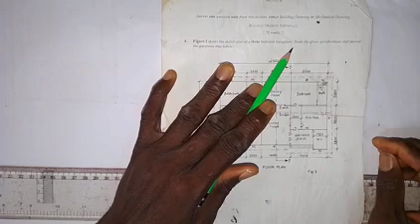Here we're going to be working on this building drawing problem. Figure 2 shows the sketch plan of a 3-bedroom bungalow. Study the given specifications and answer the questions that follow. So the specifications that we are talking about, I don't have it as hard copy here with me, but I have it as soft copy on my laptop, and I will be making use of whatever we need from the specifications on my laptop.

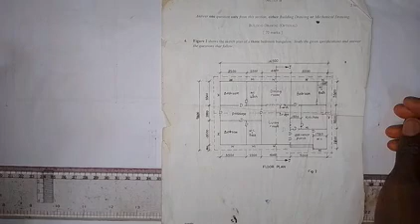And let's look at the dimensions on this sketch plan. So the distance from here to here is 14,500, that is total length, and total width is 9,800. From here to here is 3,500. From here to here is 2,000. From here to here is 4,000. From here to here is 5,000 to this end. And then we have that from here to here is 1,500.

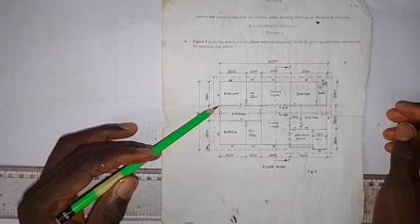On this side we have that from here to here is 3,500. From here to here is 2,000. From here to here is 3,500, and from here to here is 800. So we have from here to here to be 2,800, from here to here 3,500, and from here to here 3,500. So we are going to make use of these dimensions to produce the sketch plan first. Then we go on and work out the thickness of the wall as we proceed.

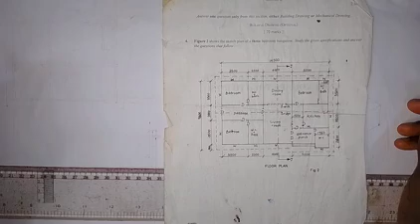So let's start like this. The first thing that we are going to do is to draw a horizontal line. So here we draw a horizontal line, and then coming down here we are going to draw a vertical line from this end. Then we are going to take dimensions on the horizontal.

So we have 3,500 first, that is 35. We are making use of a scale of 1:100, so we divide each dimension by 100. Followed by 2,000, that is 20 millimeters. Then 4,000, that is 40 millimeters. And then we end it with 5,000, that is 50 millimeters. And then we have to take a measurement of 15 millimeters inward from where we end that 50 millimeters. So we have this on the horizontal.

Then we take 35 down, so this is 35 millimeters. And then we have 2,000, so this is 20. Then followed by another 35 millimeters. And then we have 8 millimeters. So we are going to draw a horizontal line from here, but before that, let's first draw this vertical line. Then we draw a horizontal line from this end.

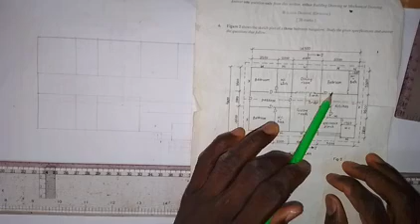Other dimensions that we have here, we also have the distance from here to here to be 1500. From here to here is 1500. So what we need to do is take 1500, that is 15 millimeters, from here to here, so that we can get this line. That's what we need to do for that. Okay, so let's quickly have that.

So I've taken a measurement of 15 millimeters. So from here, this is 15 millimeters, and then I'm going to draw a vertical line from here down. Okay, so we have it here. This line also, I need to join together as we have it in the sketch plan.

Okay, other things that we have here are the steps. We have 2 of them, 1, 2, and according to the specification, the riser is 150 millimeters while the tread is 220 millimeters. In this sketch plan, we are making use of the tread, which is 220. If we divide 220 by 100, that will give us 2.2. There are 2 of them here, so we just leave each of them as 2 millimeters.

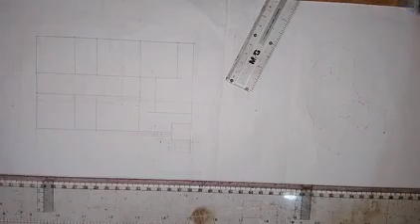So we come to this point here. Let's make use of this line. Here we are going to take 2 millimeters, 2 millimeters. So this is 2 millimeters, and here is another 2 millimeters. We are going to draw a horizontal line on each of these points, this horizontal line and this horizontal line. So we are using the tread in the sketch plan. That is what we have here. Okay, I will make this line a thick line. All right, so with this, we have partially made the sketch plan.

The next thing that we are going to do is to bring out the thickness of the walls. So let's see how that goes. We go to the walls in the specifications. The wall details are there: all walls 225 with 12 ceramic tiles wall finish. So if we add 12 to 225, that will give us 237. If we divide 237 by 100, that will give us

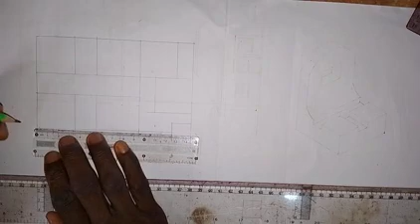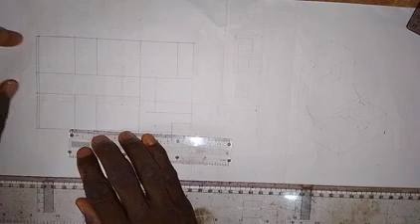So join this together like this. Okay, so we have done that. And then for this one, the first lines that we drew are for the external part of the wall. So we can only take the thickness inward, not outward. So take note of that.

And for this, we also take this. So for the inner one, you can take it to either of the two sides. So I'm taking this now to this side. So this is 2 millimeters. And then we come up here, we also take 2 millimeters. Then we join this together. Okay, so we have done that.

Then the next is for this one, I will take it in here. So 2 millimeters. So we come up here, we take 2 millimeters and we join this together. Okay, so then for this, I'll take it to this side.

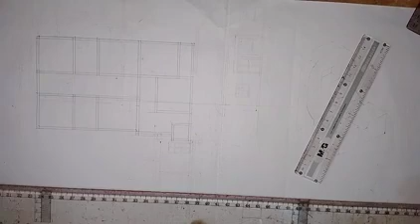Alright, so we have this, and then we also have a wall here. Then we also have a wall here. Then we also have this vertical wall. All right, so we have taken the walls. All right, so before we go on to fix the windows and the doors, let's look at what we have.

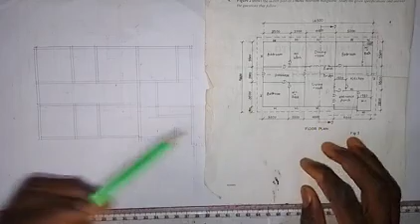This is an entrance porch, and at this point here in this space, there's going to be a beam here. So that means that this line, we need to draw it with a short dashes line. We use a short dashes line to indicate the presence of a beam in the building. So that's for the beam that we have there.

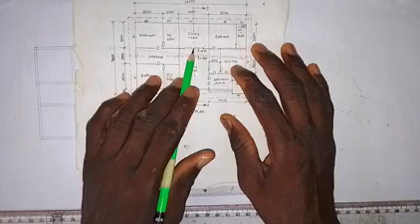Then we also have an arc here in the dining room. So we also need to work that out. So I will just come here and take a measurement of something like 6 millimeters away from this end, and I will also take 6 millimeters away from this end for me to fix the arc that we have there. So I can now draw the arc with a short dashes line. Okay, so we have that, and then the same thing here.

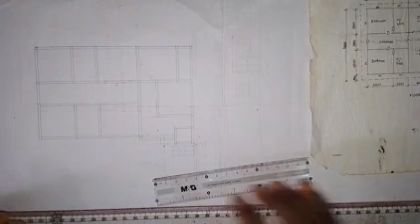Alright, so we have taken the walls, and I've also done the writing of what each of these parts represent. So let's meet on a video for the fixing of windows and the doors, and then we continue from there.